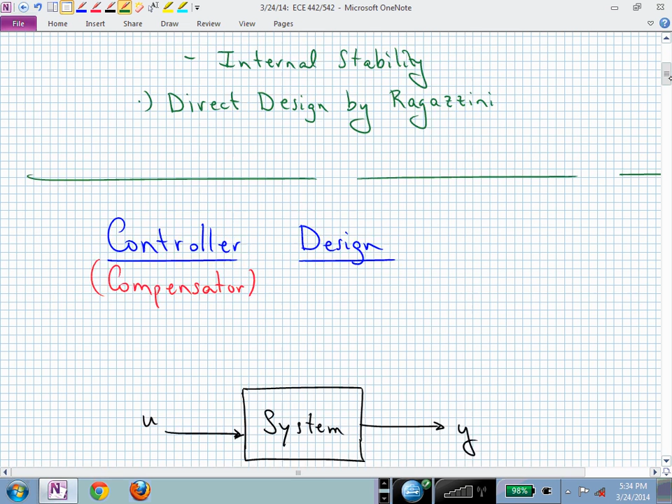Maybe this will provide you with insight into somebody going, oh, look at this, this is going to work. And you design a controller and then you start thinking, why is my system sort of not working the way I want it to? At least you'll know maybe why it's not working the way you were hoping it would work. That's the idea. Let's begin our scrolling.

We have a system, and that system, I haven't provided arguments for the input U and the output Y. I've just left those blank. That could be T, it could be Z, it could be N, it could be in the frequency domain or time domain is what I'm meaning. If it's in the time domain, it might be U of T or U of N. If it's in the frequency domain, it might be U of S or U of Z. But you now know how to interpret all of those different forms of this input-output relationship, and now you have a system.

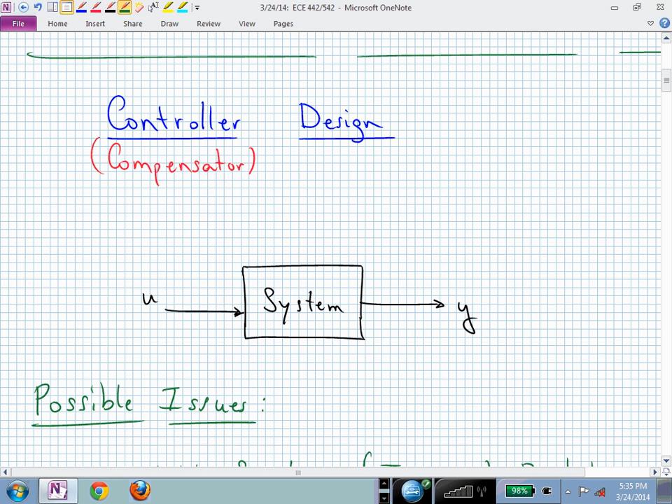That system might be in the form of a transfer function, state space representation in both discrete time or continuous time. But we know that that doesn't always come in the right package or with the right characteristics. For example, maybe it's unstable, and one academic problem that's typically used frequently for an unstable system is an inverted pendulum.

So can you stabilize a ruler or a yardstick on your hand? And if you can do that, then you're a good controller, right? How many have ridden a Segway?

Just the former president—President Bush, I think, was riding Segways. And they give campus tours on the Segway, so whenever you see that, you might think, oh, that's an inverted pendulum. I know how to control that, or I can control that.

You've probably ridden a bicycle. If you just tried to balance, in a sense, that's an inverted pendulum. A rocket is an inverted pendulum, and we try to control that rocket to go from point A to point B and hopefully stay within that particular trajectory from A to B. Those are control problems of unstable systems.

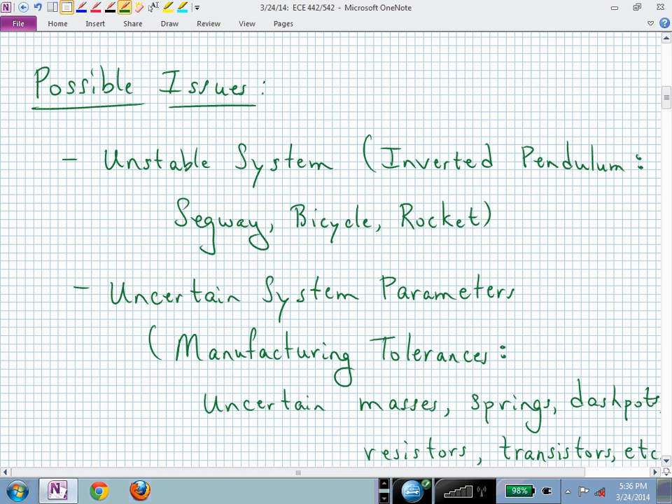Your system might have uncertain parameters. Maybe you're just given a bunch of springs, 1,000 springs, and they're not all going to be manufactured exactly the same. Or you might actually be expending fuel in your rocket, and now your mass is changing as your rocket's flying. How do we deal with that?

So your system might have adjustable, uncertain, or unknown values associated with it. And we want to be able to connect a controller to that system so that the closed loop behaves consistently, even though the original system may not be very consistent.

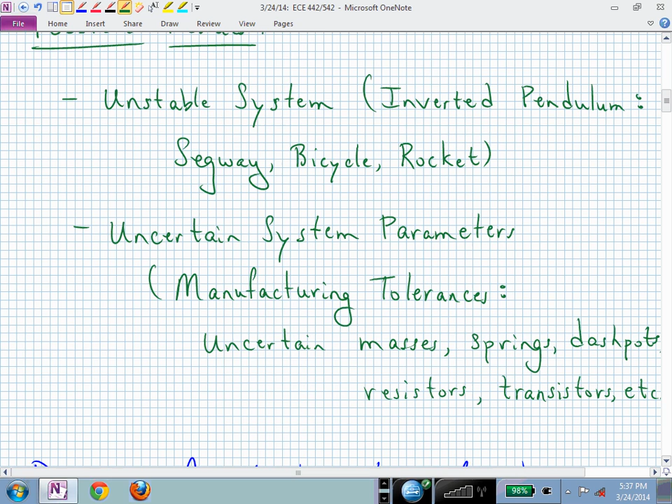And you've seen that maybe in an earlier class with transistors, where maybe you use the feedback concept because the gain of that device may be all over the place. But if you connect it up properly, then it will start to give you a more predictable or effective or consistent input-output behavior characteristic. And that's what we're wanting to do with our controllers.

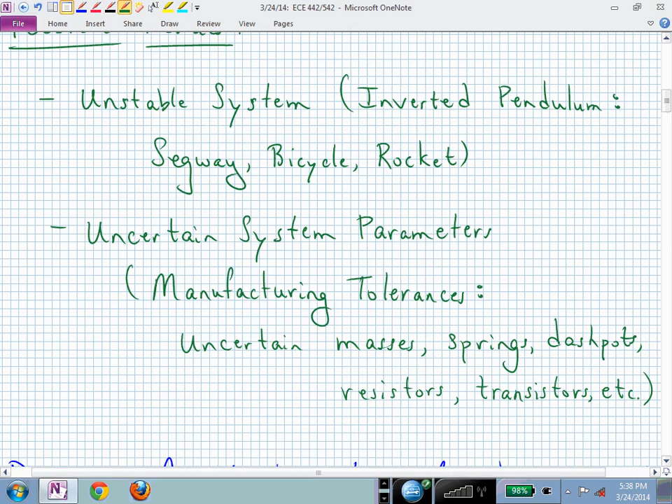We have these possibly unstable systems, but probably, definitely, a system whose parameters might not be very predictable. Maybe they are in a range, but you want to hit that target every time. You want to make sure that even though your system might vary in the open loop by 100%, maybe you want to maintain this input-output behavior relationship to an accuracy of less than 1% between your input, reference input, and your output. And that's what I'm saying here.

Your desire is to maybe correct that open loop system into a new desired system, make that desired system—this is now T sub C. I'm afraid I have a lot of T's floating around: T we use for the sample period, T sub S we might use for the settling time, and now I'm using T for a transfer function.

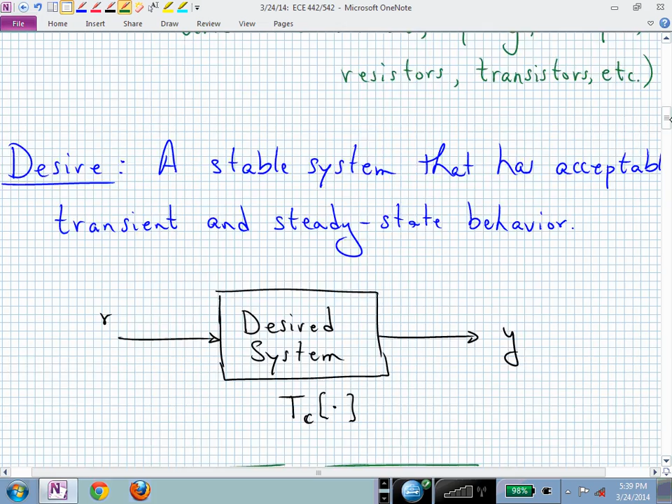But I'm hoping that you see by context that this has some brackets associated with it, and it's a transfer function. This is, let's say, T controlled, because this might be T sub C of S, it might be T sub C of Z. I haven't yet said, but you should be able to work with both of those kinds of scenarios.

We're just going to focus on two types of control structure today and most of the semester, if not the rest of the semester: open loop and closed loop.

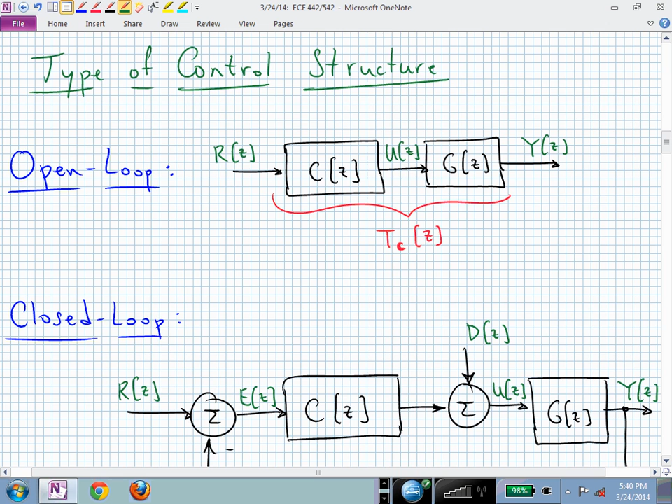If you simply want a T sub C of Z, a desired transfer function, and somebody gives you a plant, can you design a compensator, a controller, that maybe just inverts that plant and plugs in what you want it to be? That might be a design, but we'll see that maybe that's not going to work all the time.

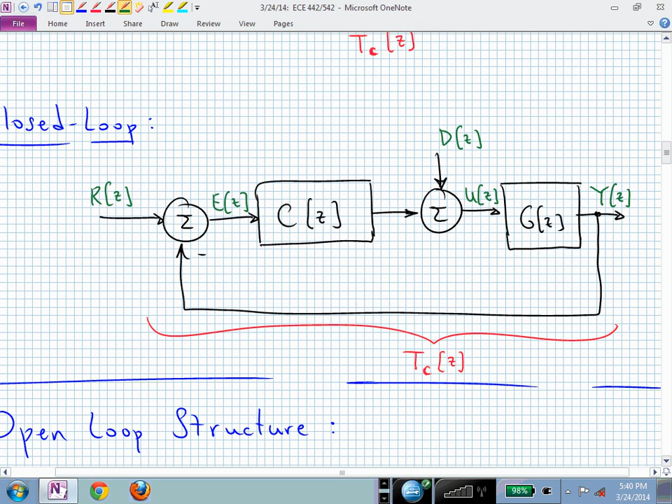Or we might have a closed loop design structure, and this should be comfortable to you, or you should be familiar with this diagram. And now I'm referring to this transfer function T sub C of Z between the reference input R and the output Y. And you have to find the transfer function that T sub C of Z corresponds to or is equal to.

Let's look at some of these situations that I hinted at before. For example, in the open loop structure, we want this combination of the plant G and the controller C to be like a transfer function that we want it to be.

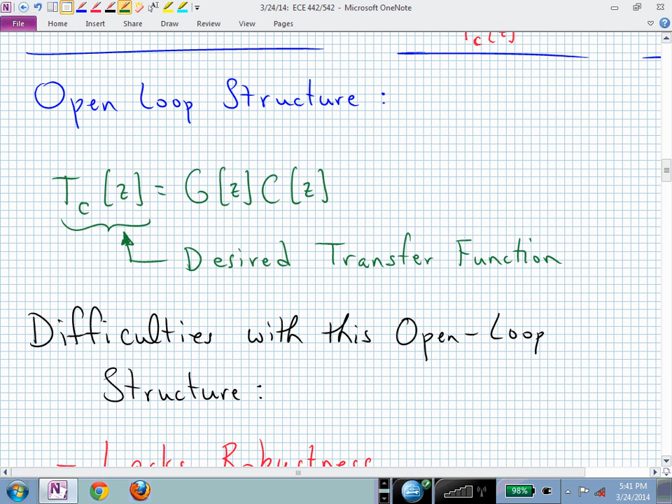What are some difficulties that might arise with that? And I don't know if you've heard this word much at all, but in a controls class, in a controls setting, in a controls environment, people are going to be talking about robustness. Is your controller robust? That means, does it work consistently when your plant might vary all over the place in terms of its parameters?

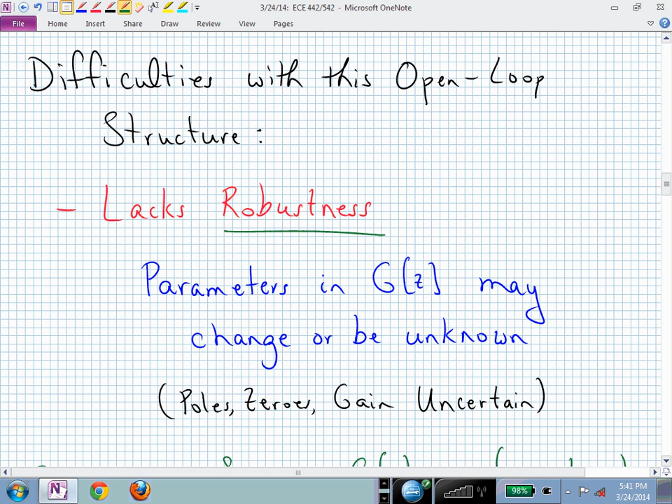Is your system robust? For an open loop system, it's probably not a very robust design, because the parameters in G of Z may, like we said, be unknown, or they might change. And if your parameters vary, then your poles or your zeros or your gain—or all three—might be unknown or moving around or unpredictable.

Now how do you control it? Let's look at a very simple case. Here's an example.

Suppose this plant is just a constant, and we'll call it little g. Then our desired transfer function between the input and the output is the product—this is open loop again—of our system G, which is just a gain, and our controller C of Z.

Now, if we want good tracking, what does that mean? It means we want the output Y to look like the input R. If I have a telescope and dial it to a certain angle to point at a star, I hope it finds that angle—if I turn it 10 degrees, it shouldn't go to 50 degrees; if I turn it to 50, it should go to 50. In terms of driving, you want to tell your car, I want to go 30 miles an hour, now 50 miles an hour. It's tracking your input. That's what I mean by a system tracking the reference input.

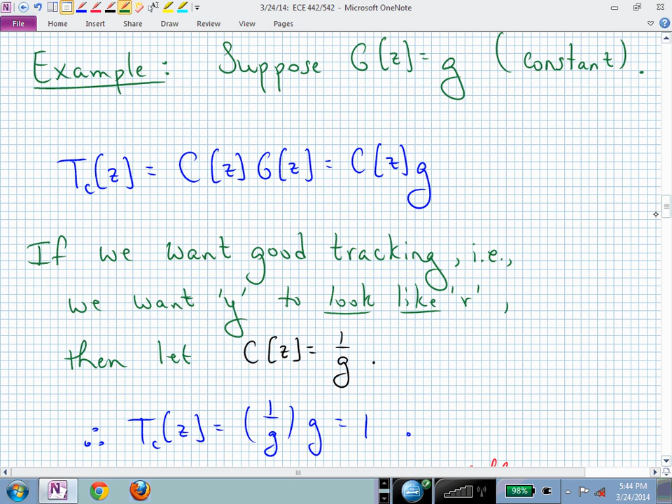There's always a 'but.' But what if the plant wasn't what you thought it was, or it's changing, or it's now a different constant? Maybe this plant is some device you're having to control, coming off the assembly line. Now you get a G, you get a G1, a G10, a G30, a G1000. They're not all going to look the same. And you've now designed for one G. Uh-oh.

Now that T sub C, let's call it sub 1, is what we thought we were supposed to get: 1 over G, we'll control it with 1 over G, but now it came out as G1. So we're not looking at 1, but at this new ratio, G1 over G. In terms of response, if this is where we wanted to be—say 10 degrees—because G and G1 are not the same, maybe we get to 7.5 degrees.

And for that reason, Y does not look like R. There's an error—the difference between where we wanted to be, our reference R, and where we actually ended up, Y.

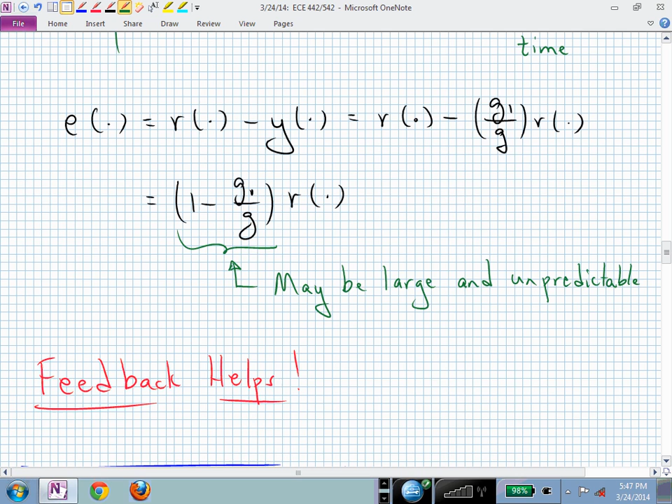That was open loop. Now, maybe that's not what we want. Let's look at the other scenario, the closed loop case, or when we have feedback. So now when I say feedback, we have that closed loop configuration we introduced earlier, and this is the structure we're dealing with. Does this help us out a little bit? I've already hinted that yes, it's going to be better than open loop, but let's see what else happens.

So here is our system, and if we simply want to focus on the reference input to the output Y, then what do we do with our D, which is a disturbance?

We can just zero that out. This is a linear system. If we're interested in what's happening to our error due to a disturbance, or what's happening to our output due to a disturbance, we could look at that transfer function and let R equal 0. The external transfer function between R and Y is the one we usually concentrate on, but we have to make sure our system remains internally stable. No matter what happens to D and R, E better be well behaved, and Y better be well behaved for a disturbance D. If I give you a bounded disturbance, you better get a bounded output.

There's our closed loop transfer function: GC over 1 plus GC. That should now be emblazoned in your head, in your brain, until at least after the final. And if you're interviewing and somebody asks if you've had a control class, and they give you this block diagram, or maybe you draw that block diagram for them and say, oh, we were dealing with this kind of control scenario, you can say the transfer function is GC over 1 plus GC.

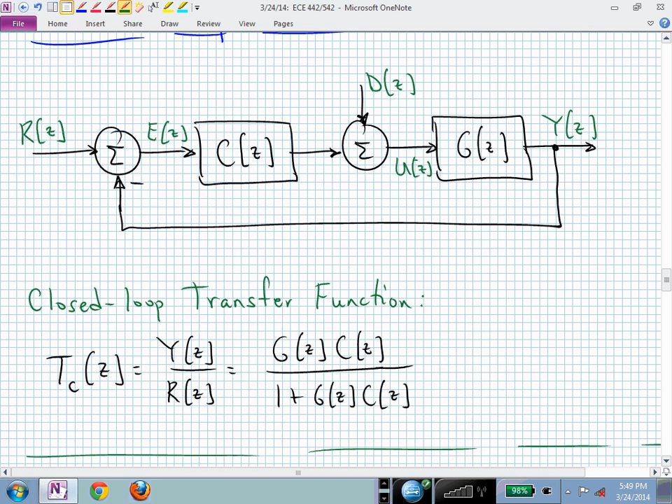And if you've forgotten, you can just rederive that with some block diagram algebra. Y is just GC times E. The error signal is the reference minus the output. Make that substitution, and now you have Y is equal to GC times the error, which is R minus Y. Do some algebra, pull the Y terms to the left, divide by that expression scaling the output Y, and now we have our controlled transfer function T sub C of Z: GC over 1 plus GC.

It's the forward branch if we have unity output feedback. Unity, there's nothing but a wire between the output and the summing junction, so it's unity, and it's negative output feedback. With unity negative output feedback, we have this plus sign, and in the denominator we have 1 plus GC. Upstairs we have the forward path, which is GC.

What does feedback buy us? Here's an example with feedback. Again, we have a plant that's a constant, G. Suppose now somebody says, let's just have a controller that's a constant also, K. Well, we just derived the transfer function between the reference input R and the output Y. That was GC over 1 plus GC. Capital G is just lowercase g, a constant. The controller is a constant, capital K.

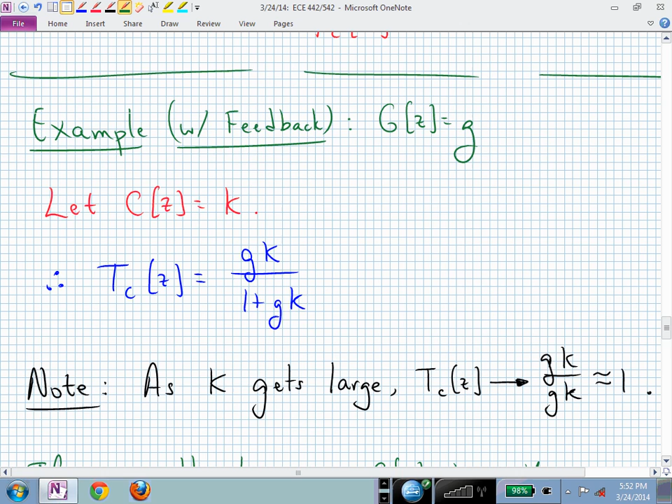And now if you let K get big, GK dominates 1. The denominator starts looking like GK. GK looks like the numerator. And that, now you have a ratio GK over GK, and it doesn't depend on G. Now G could be G1, it could be G30, it's still going to be G30K over G30K. And if K is big, we get what we wanted, 1, for this transfer function between the reference input and the output Y. So our output tracks our input for large values of gain K. That's what we want.

Anybody reading along?

If we could cure everything with a big gain, you wouldn't even need to be here for this class. This class would be unnecessary. But then you couldn't command the big bucks when you graduate and say you've had a controls class. So there has to be more to it than just cranking up the gain K and celebrating.

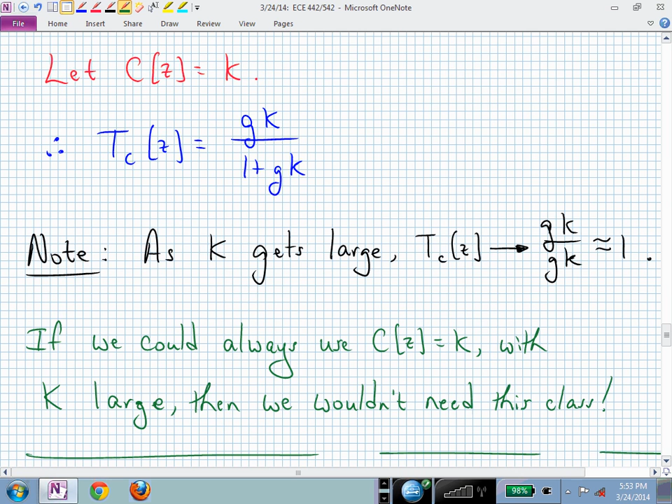Sometimes you need just a little bit more than that. Sometimes that's all you need is a large gain, and that corrects things, as we just saw in the last example. Here's another case. Let's look at a system that's a little more interesting, with some dynamic behavior versus just a gain.

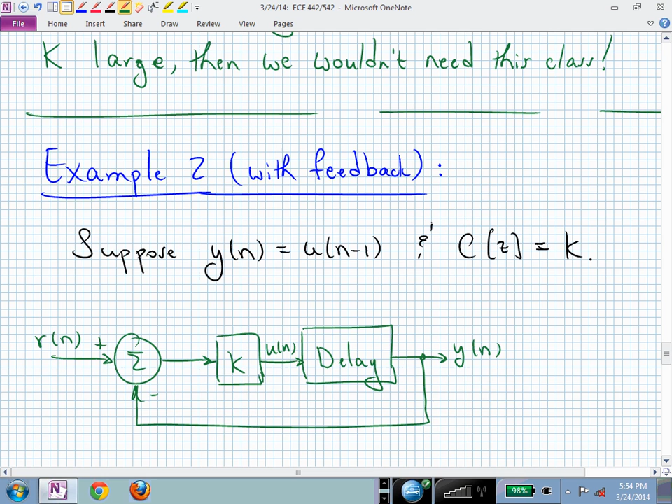Suppose our system now is just a pure delay. Suppose Y, the output, is just the previous input. You put in an input, it's just going to sit there in a memory location or a holding pattern, and the next time step, that becomes your output. Let's connect that in this classical feedback configuration and see what happens. Again, let's just keep our controller as a constant K. But this system now has some dynamics. It's a memory, just a one sample period delay. And what happens?

Suppose we want Y, our output, to track a constant, a step. Let's let the reference input be 1, a unit step, and we'll say here is our time t equals 0. We can draw that on paper, paint it on the floor, or put it in the sand. We can figure out where time t equals 0 is. From that point on, what's going to happen?

We know how the output y is related to the input. It's just the input one time step before. Meaning y at time 0 is u at time n equal minus 1. And we're assuming everything was non-energized for this example.

U of minus 1 is k times... u is just k times this signal, which is the error signal. And if you're listening at home, you don't know what signal I'm referring to, do you? There, it's highlighted now. But that's the error signal, k times that error, and the error is just r minus y.

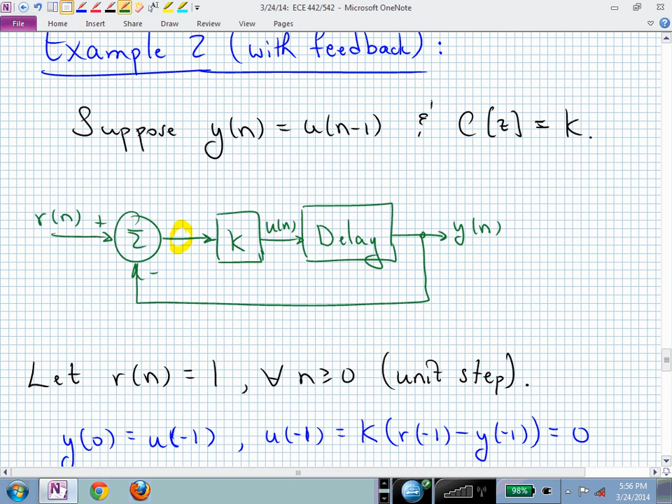That's okay, haven't done anything. Now let's turn on the input, or the reference signal. U at time 0 is k, r of 0 minus y of 0. Well, we just computed what y of 0 was. That was 0. R was the unit step.

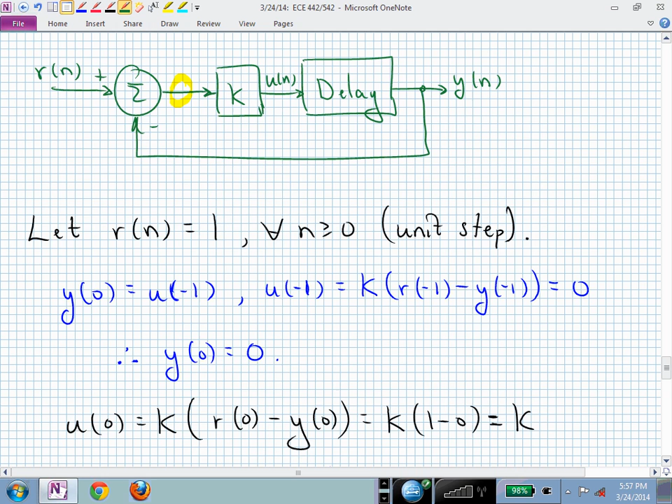That's just going to be 1 from now on. So the u of 0 is k. And that tells us now what y is at the next time step, y1. y1 is just u of 0, which is k. We're at 0, then we're at k.

Now we know how to find u of 1: k times the error, and the error is just r at the time that we're interested in, which is 1, minus y of 1. So we have k times the reference input 1 minus k. Now u of 1 is k minus k squared.

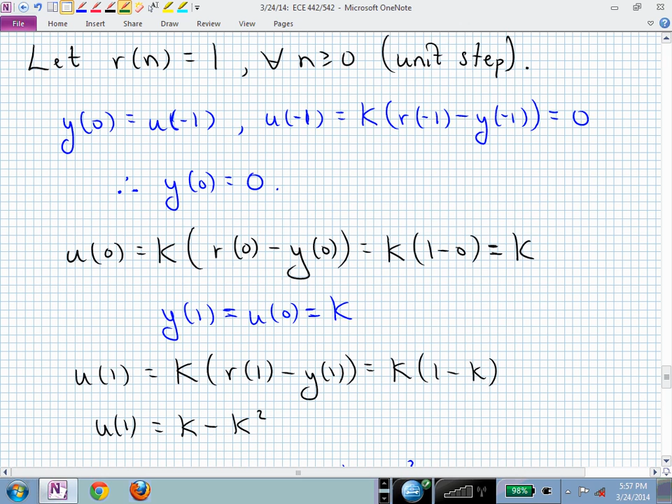And that's going to be what y at time 2 is. Y of 0 was 0. Y of 1 was k. Y of 2 is k minus k squared. Can you see a pattern?

Oh, let's find that pattern. U of 2 is k, r of 2 minus y of 2. But y of 2 we just found, that's k minus k squared, which we subtract, and we get minus k plus k squared. Scale that by k, and now u of 2 is k minus k squared plus k cubed. So now we're just alternating signs and raising k to higher and higher powers for each subsequent value of y.

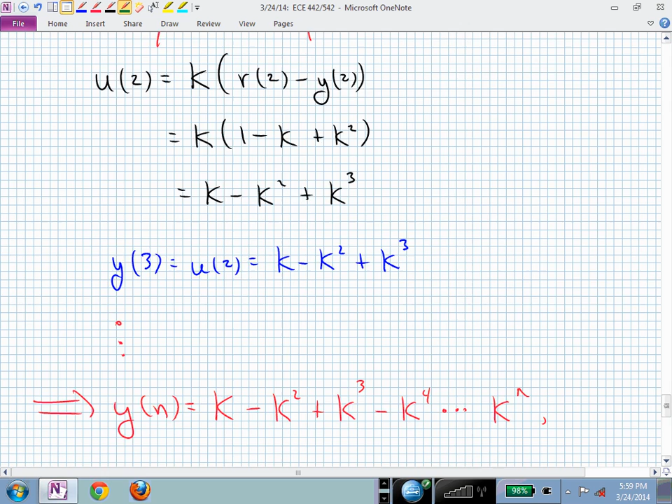So now if you were thinking we could cure everything with a big K, think again, right? Now we have dynamics in our system, just a delay. That's about as basic of a system as you can obtain. And now what do we have? As long as k is less than 1, we'll sort of be okay. It may not get us close to where we wanted to be. Maybe we say let's go to 1, and we end up at a third. But at least that error is not going unbounded.

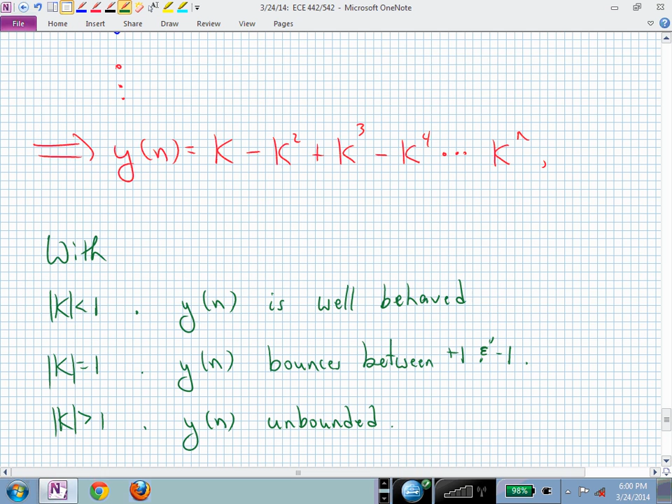If k has a magnitude of 1, then you're adding 1 each time: 1 minus 1, so it could be 1, 0, 1, 0, or it could be 0, minus 1, 0, minus 1. It's switching back and forth at each time step. And if k is bigger than 1, now you're just going to be violently banging back and forth between a big positive value and a big negative value. So we can't solve everything by cranking k up if we have some dynamics in our system.

There's our takeaway: we can't cure everything with a large gain, not all the time. And there's sort of an example. So if we were in a math class and somebody said, oh, you can cure everything with a big K, now there's your counterexample. So there's an economics example. Maybe that's your budget. Never mind.

All right, we'll slow down a little bit, but we've now figured out that maybe feedback is better than not. But can we figure out what we can do, or how to build up that controller based on this interaction of our system and potential structures of these controllers C of S or C of Z? We may not always want to just use a gain. We may have to put some poles and zeros in there. What are some benefits of feedback?

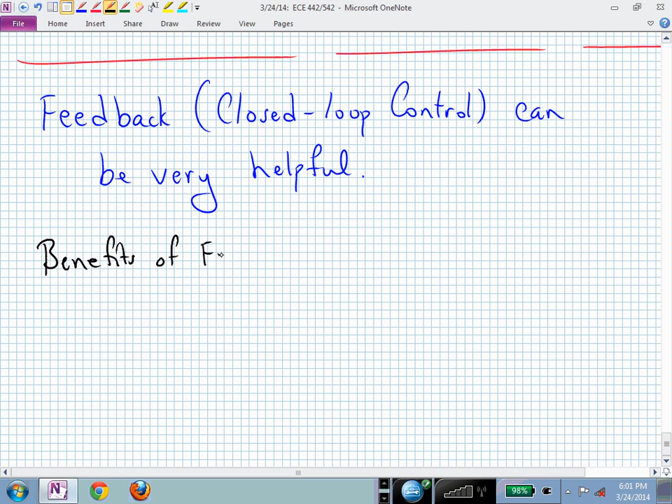Do you remember our Segway? Not the transition between topics, but this device that we might ride, or a bicycle. If you just had to try to stand on the bicycle and not move, it's not easy to keep it upright, is it? That system may be unstable. Maybe you have this inverted pendulum. Well, feedback's going to allow us to stabilize unstable systems.

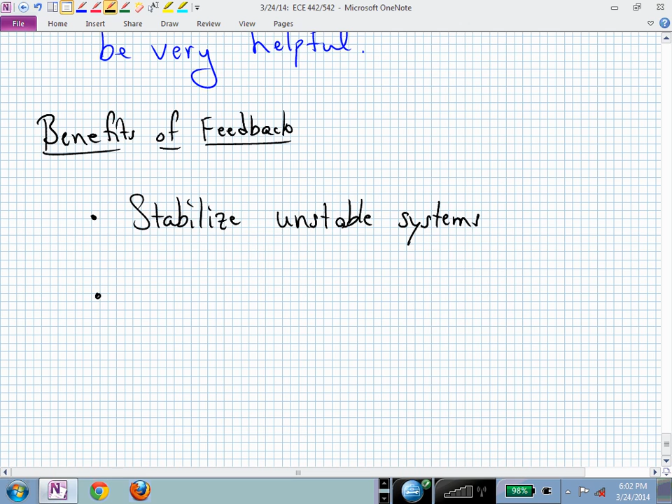But all systems aren't generically unstable. You might have a stable system, you just want it to behave better, more predictably. You may want to change the system behavior.

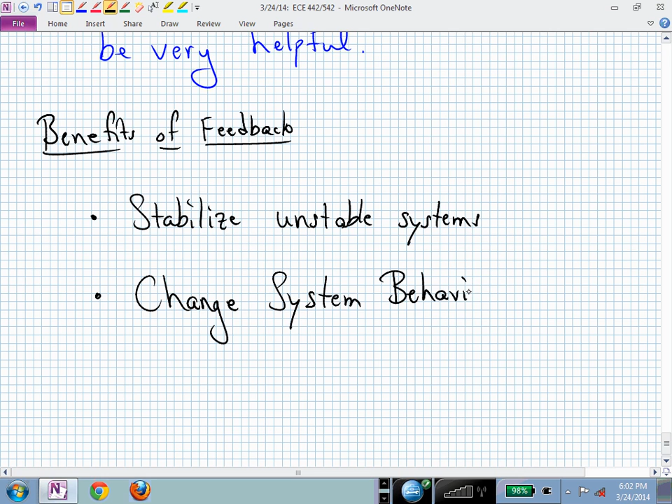And there we really have two main classes of behavior that I want to refer to. One behavior is to improve the transient characteristics or properties. So improve the transients.

And what have we used to measure those transients? How quick are we going to settle? What's our settling time? Maybe that's not quite fast enough. We want to enhance that, we want to shorten it. One transient we might be interested in is a settling time behavior or characteristic.

Now, is that motivating some other transient properties? What was our robot arm that was moving close to a confined space? Overshoot. We may not want too much overshoot. We may want to improve the percent overshoot behavior of a system. That's a transient behavior.

We may want to get quickly to our destination, or we might want to have a quick time to the first peak. We want to minimize our peak time. That's one class of behaviors that we might be interested in, which are transient behaviors: settling time, percent overshoot, peak time.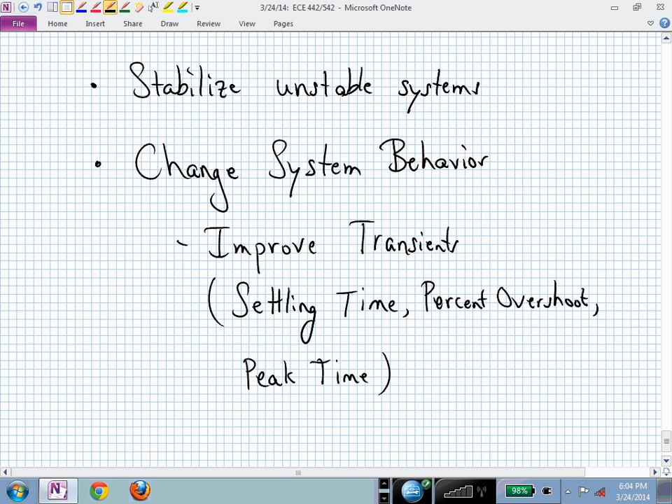Another category of system behaviors is how well does Y, the output, look like the input R. That's what I'll call a steady state behavior. Can we improve steady state accuracy?

And control, if somebody said describe control in one word, your discrete control class, one word, how would you describe it? Well, maybe it's a hyphenated word: trade-off. You have to figure out what you can trade off with steady state accuracy versus transient behavior. It's this balancing act, and that's what you get paid for. It's figuring out how to make that trade-off in the best way. You can't always get both necessarily, and you have to maybe sacrifice one for the other.

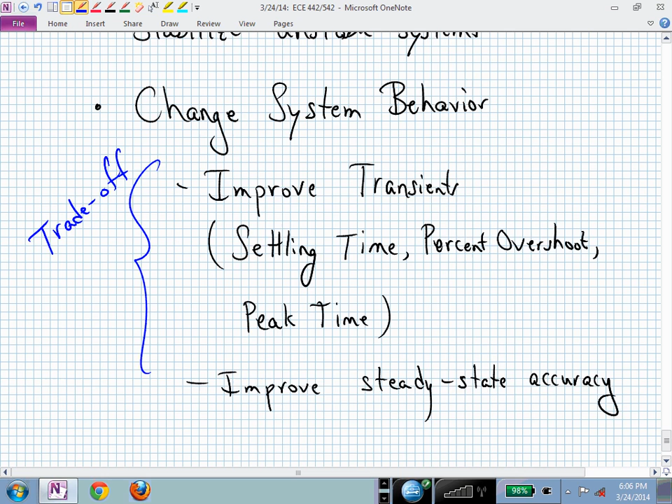Here's what we might have in terms of a picture. If you were looking at here's time, and maybe this is where we want to go. Let's say this is our desired response, or this is the reference input. Maybe this is R. And I'm not going to say whether it's continuous time or discrete time. It's just maybe a constant.

And now you look at what your system does, and maybe your system does something like that. When you say go to R, it starts oscillating, and it ends up not quite to where you wanted to go. So there's a fair amount of error between your desired response R and the steady state output. And maybe it's wiggling more, or maybe it got to that final destination in too long of a time interval. Maybe your settling time was too large. Meaning maybe what you want to do is do a better job of controlling that.

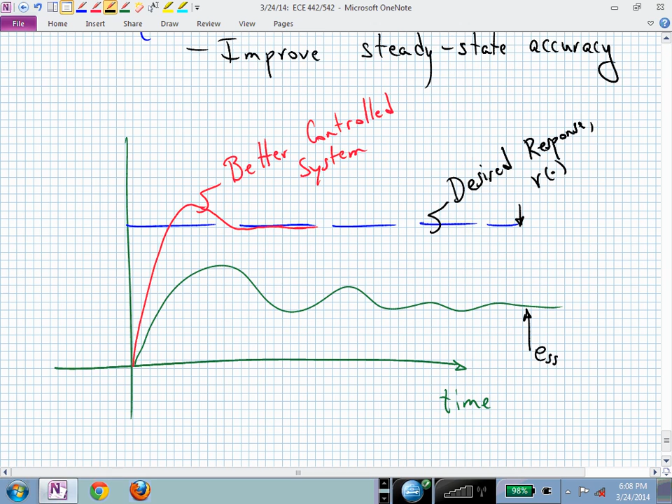And now maybe this red line is a better controlled system. It may actually have zero steady state error, where here is our steady state error. We may want to figure out how to transition from this green curve to a red curve. How do we build a controller to make that happen? And what we have to keep in mind is in the process of doing this, we can't just look at one transfer function. We need to make sure that our system is internally stable.

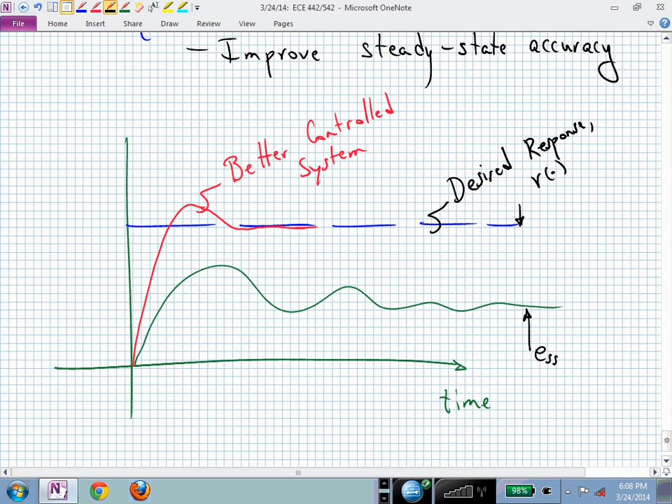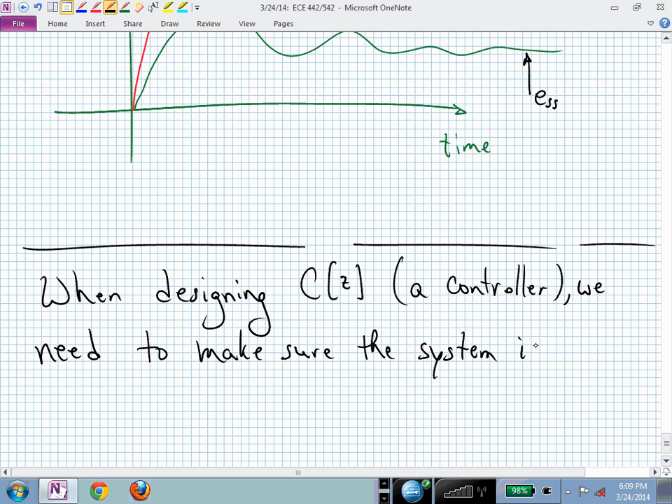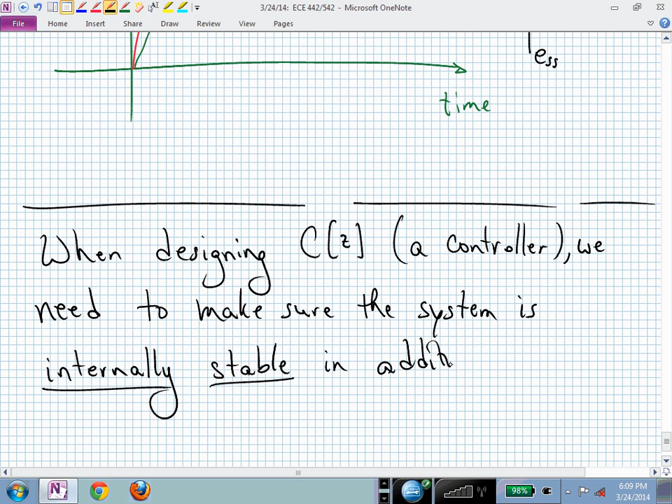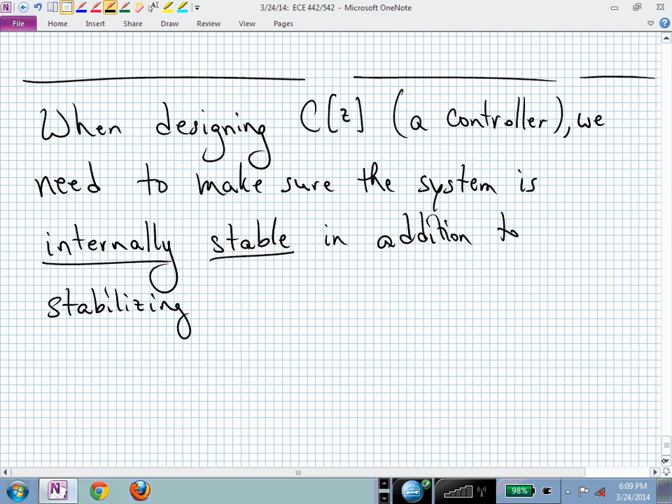When designing a C of Z, which could be this controller that we're interested in, we need to make sure the system is internally stable, in addition to, let's say, stabilizing this external transfer function, which we were calling T sub C of Z. And do you remember what the transfer function of that was? Between R and Y, which I said needed to be emblazoned in your noodle.

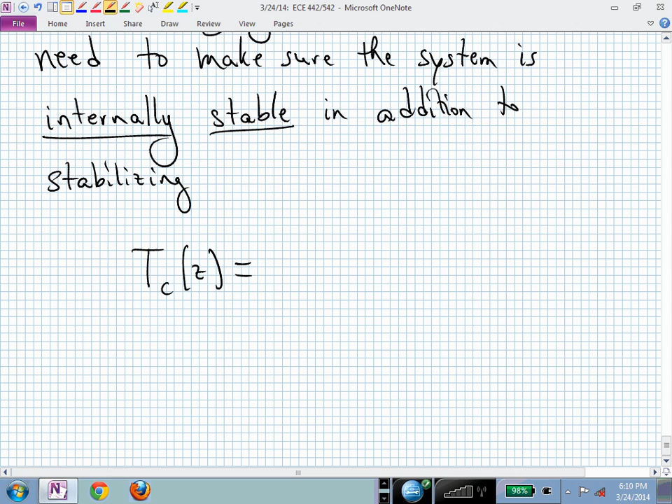Since these are scalar transfer functions, G and C commute. So you could say GC over 1 plus GC, or you could say CG over 1 plus CG. It's the same thing, since we're dealing with scalar transfer functions.

So let's say this is GC over 1 plus GC. We not only need that one to be stable, so we're now looking at the zeros of 1 plus G of Z, C of Z, but we also need to ensure that we have 3 more transfer functions that are stable, or bounded input, bounded output stable. For internal stability,

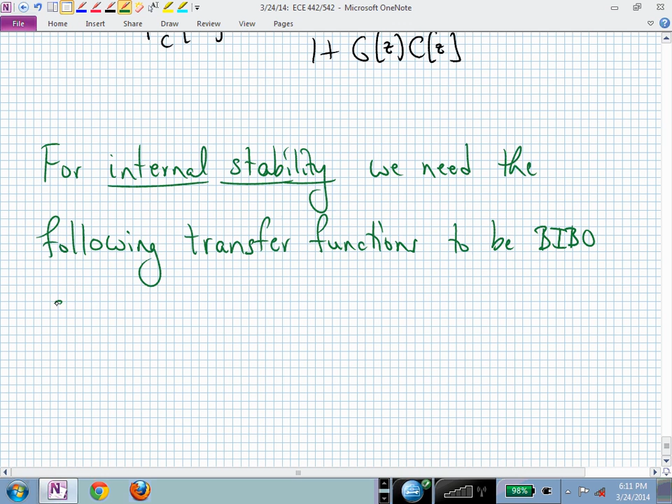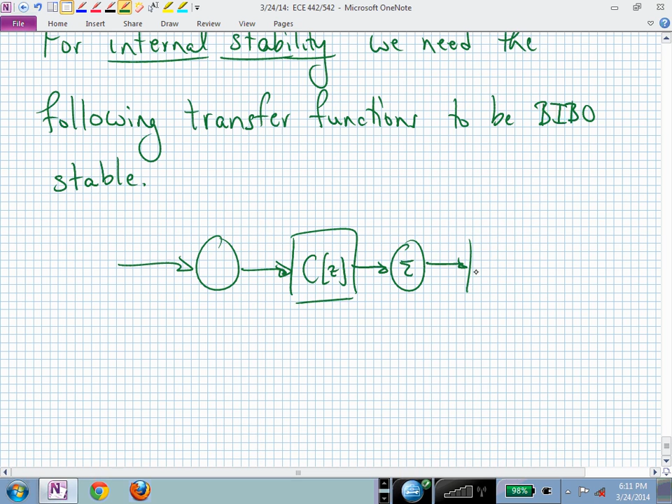We need the following transfer functions to be bounded input, bounded output stable. And maybe I should put the diagram in front of us so we can keep track of what we're dealing with.

We might be interested in the transfer function between the reference input signal and E. Meaning if I inject a bounded reference input signal R, I better get a bounded output at the error. That's one of the transfer functions that we're interested in.

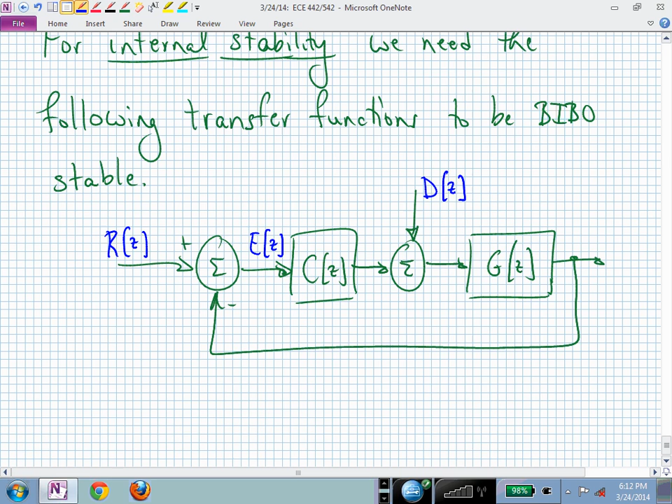We also want to ensure that if a disturbance occurs—maybe we're designing a cruise control and now the car goes up an incline, that's like a disturbance. That incline now is a disturbance input because it's different from what we're controlling with our own pedal. We want to make sure that the transfer function between D and Y is stable.

And we also want to have our input signal well behaved when we inject a bounded input at the reference. So our reference input better produce a bounded input to our system in order to be internally stable.

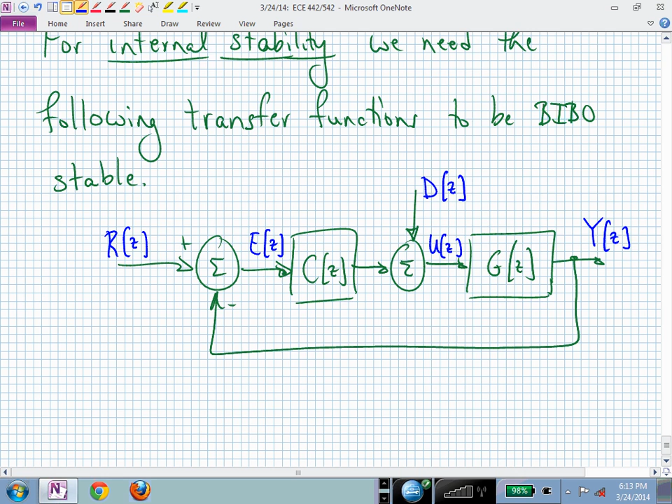If you look at and do the block diagram algebra, the transfer function between the reference input R and the error signal E is 1 over 1 plus CG. We need that one to be stable.

We need the transfer function between the disturbance and the output Y to be stable, and you can rederive these on your own tonight. G over 1 plus GC—that's not the same as GC over 1 plus GC. And this one between R and E is not GC over 1 plus GC, is it?

And the other one that we said we wanted to have stable was this transfer function between the reference input and the input U to our plant. U over R is now C over 1 plus CG.

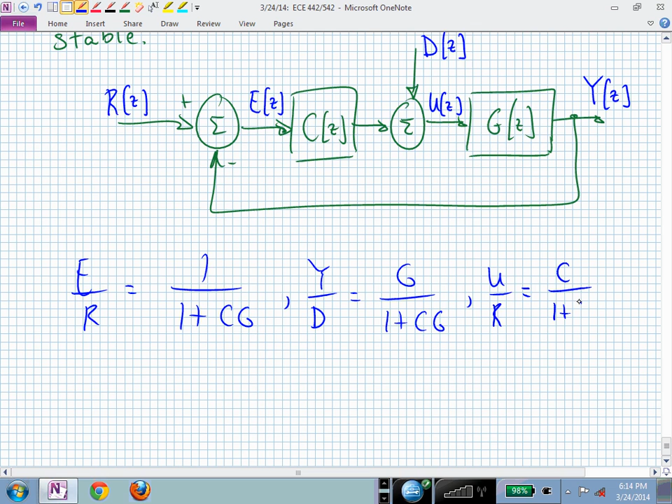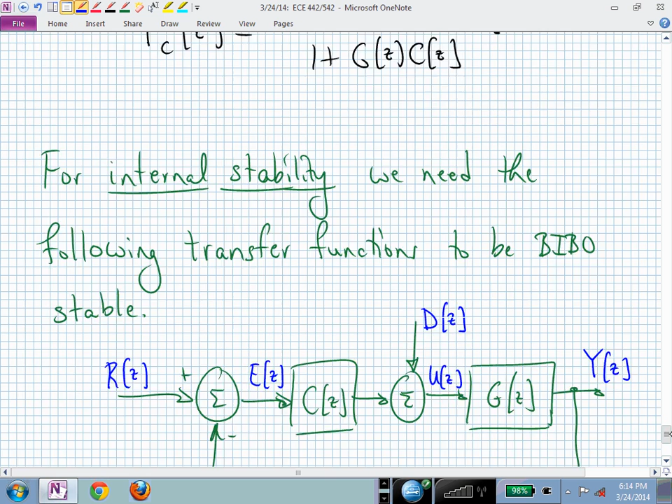Now if you look and compare that with our external transfer function—this was the transfer function between what? What was the input? The reference. And what was the output for that transfer function? The output, Y.

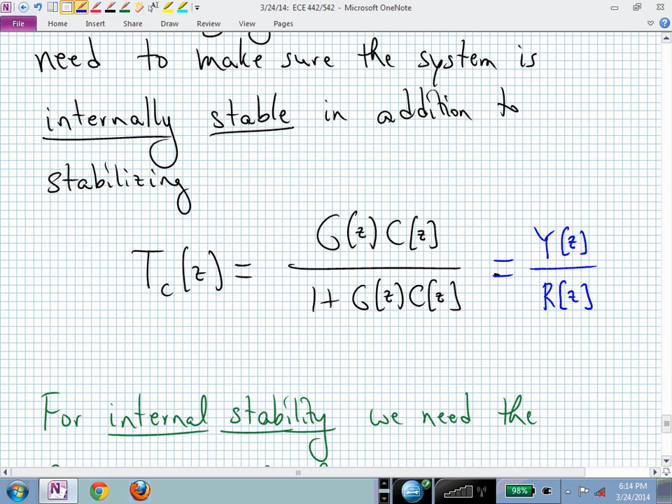That has the same denominator, doesn't it, as all of these, 1 plus CG. But they don't all have the same numerator, and so we might have cancellation issues between one and the other. Meaning if we try to make 1 plus GC nice, that may be well and good for our external transfer function, but we may have issues when we look at the cancellations we might try to create when we're designing a controller C of Z just from the external transfer function T.

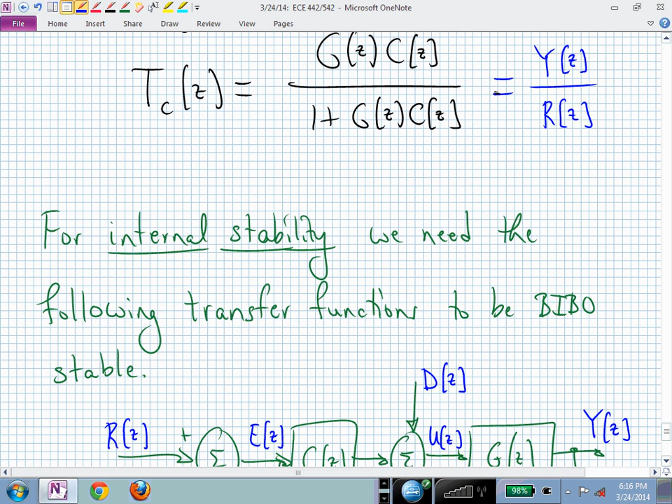If these three are bounded input, bounded output stable, then our system, we will say, is internally stable. Because of the difference between this numerator and these numerators, we're going to have some differences in poles and zeros in these transfer functions. And we want all of those transfer functions to have their eventual denominator with poles where? In this class, inside the unit circle. That will give us a bounded input, bounded output stable response.

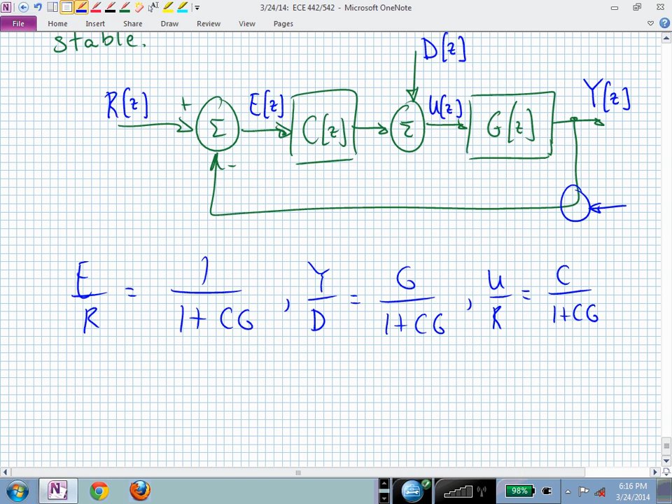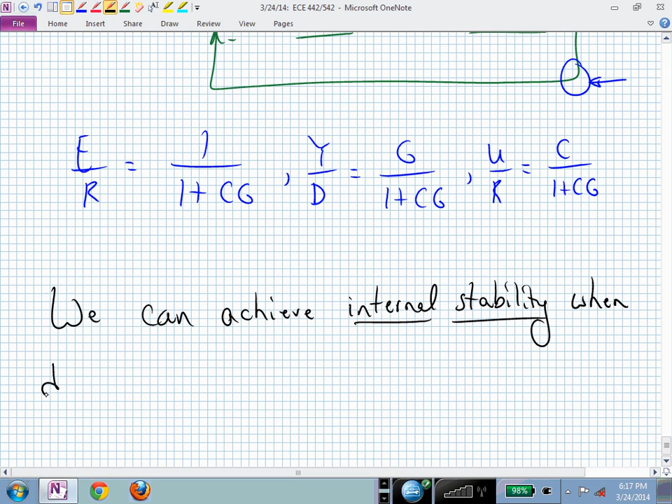Now, instead of having to check all of these every time you design a controller, we can sort of get away with achieving internal stability under this condition. We can achieve internal stability when we're designing this controller C of Z if we keep that controller C of Z

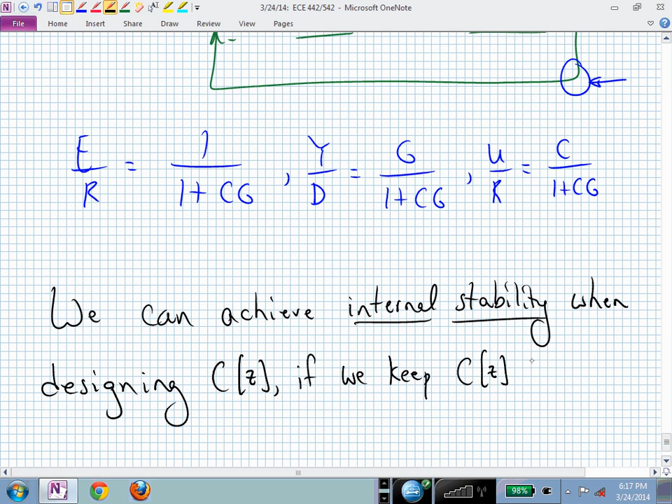from canceling unstable pole and zero factors in G of Z. Meaning if you had an unstable system, you can't build a controller C of Z and maintain internal stability if that C of Z actually tries to cancel that unstable pole in your original system G of Z. Or if you have a zero in G of Z that's living outside the unit circle, and for whatever reason you say, oh, I'm going to cancel that with a pole in my controller.

No, no, no. That cost you 50 points out of 10 on the exam.

So this is what you need to focus on. If you think, well, I don't know how to stabilize my system unless I cancel something outside the unit circle, say no, no, no, I can't do that, so I have to figure out what's going on. So we'll figure out ways to maybe give us some insight by doing state space designs. Maybe you look at this and you go, I have no idea how I'm going to control this system. Well, we'll go into a different domain and try to build a compensator using different techniques. And then we'll go, oh, why didn't I think of that? And that will then guide you in how to maybe design transfer function-based controllers, that maybe that's how you originally started trying to build a controller.

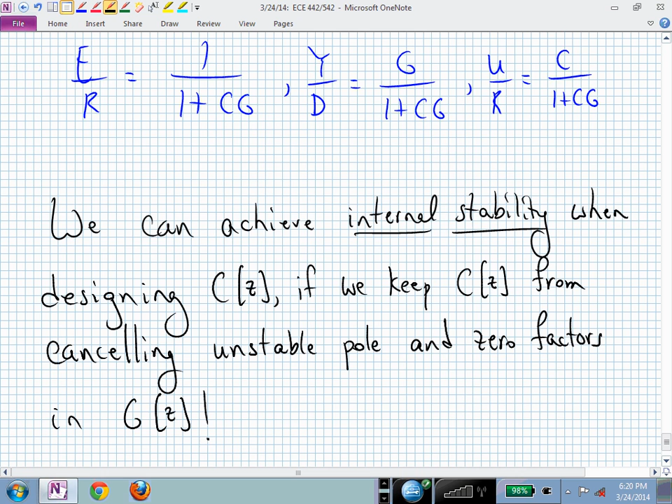Now that we have an idea that we want to make the output Y look like the input R, we want to stabilize our system, and we want to do it in a timely fashion with maybe a short settling time, a nice overshoot behavior. What we want, and we want to do it knowing we can't cancel things outside the unit circle with our controller. Let's look at some ways that we might do that.

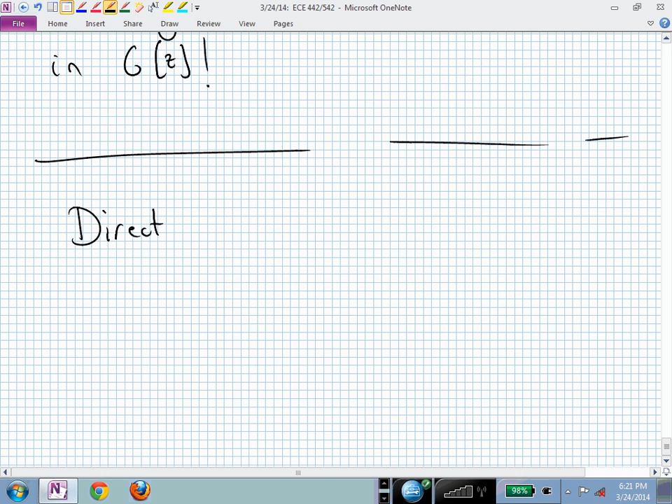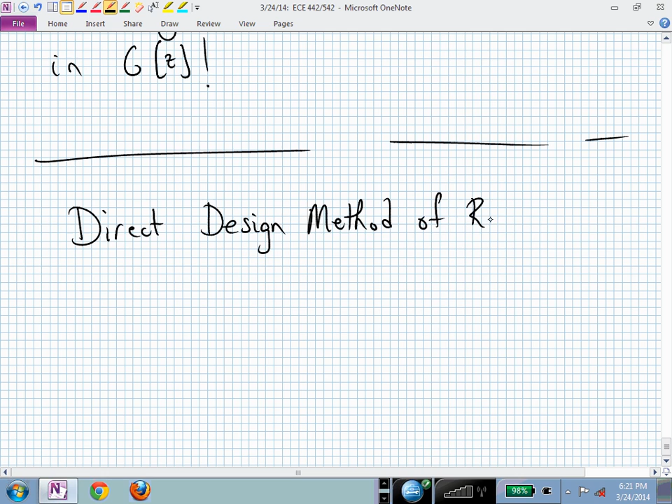And here's our first strategy. It's the direct design by Ragazzini. I just wanted to do that because of the name, right? But this is an individual that had a textbook. I think you guys were probably around 1958. Oh, maybe not. A few years ago. But he came up with this strategy. So it's the direct design method of Ragazzini.

And the reason I like to start with this is there's several reasons, but one is hopefully now you know how to build, or you now know how to specify. If somebody gave you the choice and said, give me 2 poles in the Z-plane that you want your system to possess, you now know how to find those poles based on different conditions, right? We have our Cupid spec. Bullseye and a heart, right?

So the bullseye is settling time, and the heart is percent overshoot. So if somebody gave you a percent overshoot spec and a settling time spec, those are the Cupid specs, and you now know how to make those happen with 2 dominant poles inside your unit circle, right? You know how to find an R, and you know how to find the zeta.

The zeta would then be translated into a theta sub D. Now you have your Z sub D, your desired poles, in terms of an R, a polar form, radius, and angle. And that would be your denominator of your T sub C of Z, your dominant dynamics.

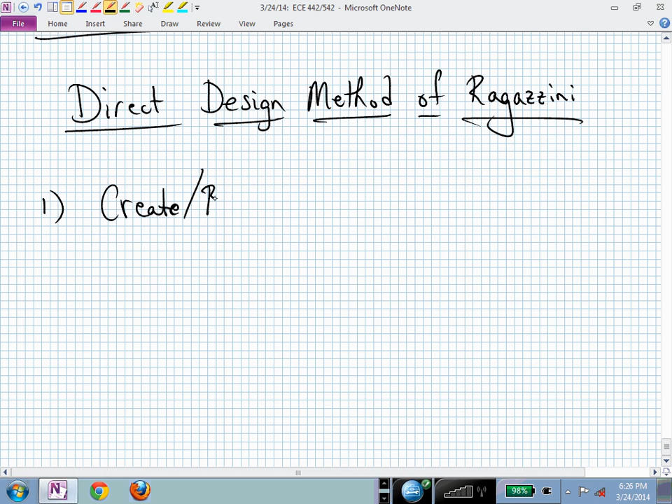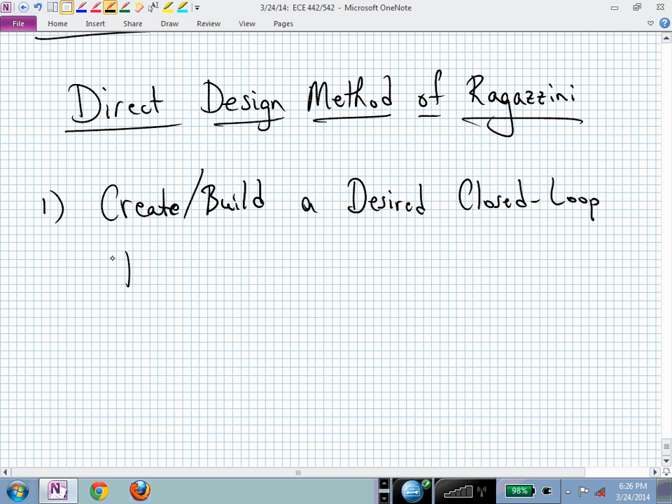Where was I? Oh. First thing we need to do is find a desired transfer function. That's the first step in the direct design by Ragazzini. So I will say, let's create, or design, since that's kind of in vogue. We want to design. So now you can get out your crayons and start designing your T, your capital T sub C of Z. So we're going to design, we're going to create or build a desired closed loop transfer function.

And now at least you know how to think about the denominator of that beast. Dominant poles might be specified by R, theta sub D, zeta, settling time, percent overshoot, peak time. Peak time gives you what? An angle in the z-plane that you might need to be beyond if you want a quick response.

Well, that seems pretty easy, but here's a big caveat. We can't just arbitrarily pick a T sub C, T sub C of Z. That's why, again, you're taking this class. You need to figure out how to build it. So certain restrictions, and I'm not going to go into those just yet, because I want to make this a two-step process. So certain restrictions will be placed on T sub C of Z. So don't forget that.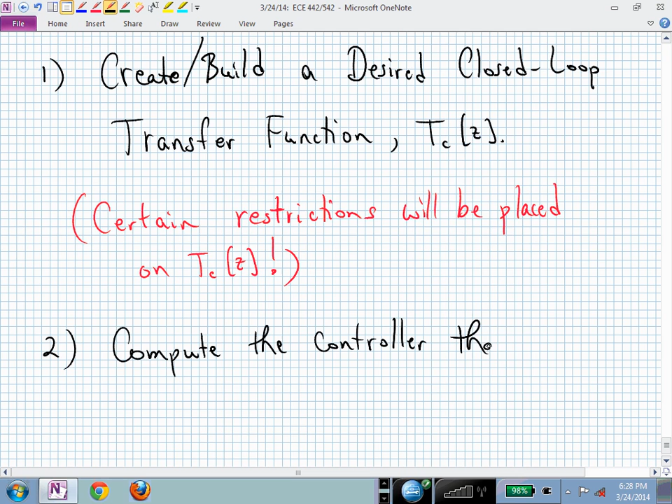But once you have T sub C of Z built properly with the appropriate restrictions, then it's just turning the crank to find your controller. Then we can simply compute the controller that makes T sub C of Z happen. And I shorten that to just say realizes. Compute the controller that realizes T sub C of Z.

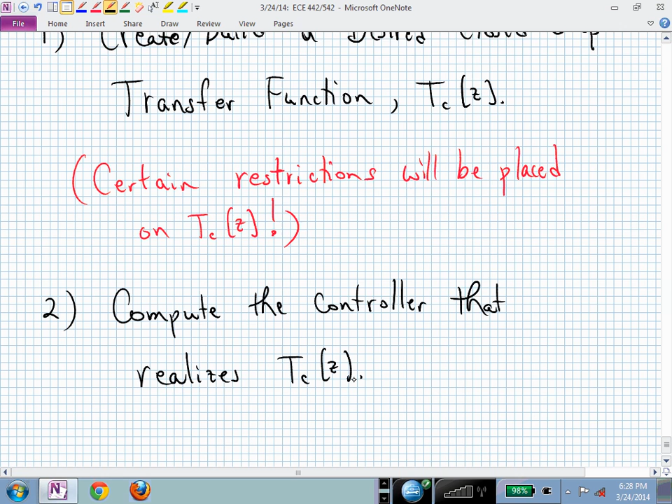Where T sub C of Z, remember, we know what that looks like because it's emblazoned in your noodle, right? That's just this G of Z, C of Z over 1 plus G of Z, C of Z. So if you wake up in the middle of the night and you scream out GC over 1 plus GC, you can just go back to bed and dream some more, okay? Because you're in the right place. GC over 1 plus GC.

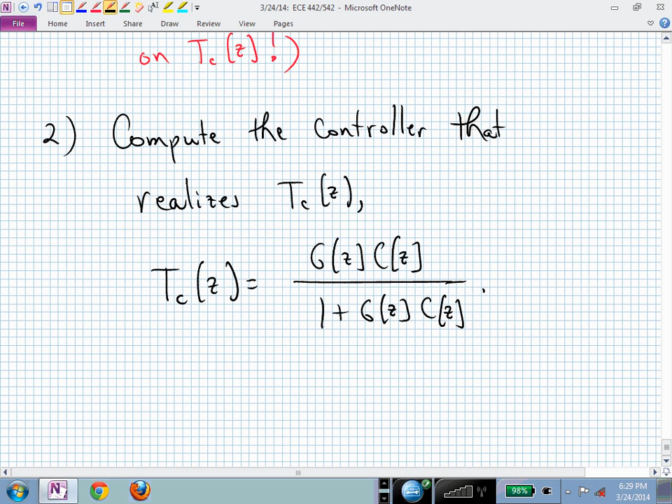Now, what does C look like if it makes T sub C happen? Well, we can just do the algebra. So now let's now solve for C from this relationship. T sub C, we're going to build. We're going to design that based on the design specs and certain restrictions. So we're going to have that in our hand or on our paper. We're going to have possession of T sub C of Z. We have our plant, G. We're now trying to find what is C. So let's just solve this for C.

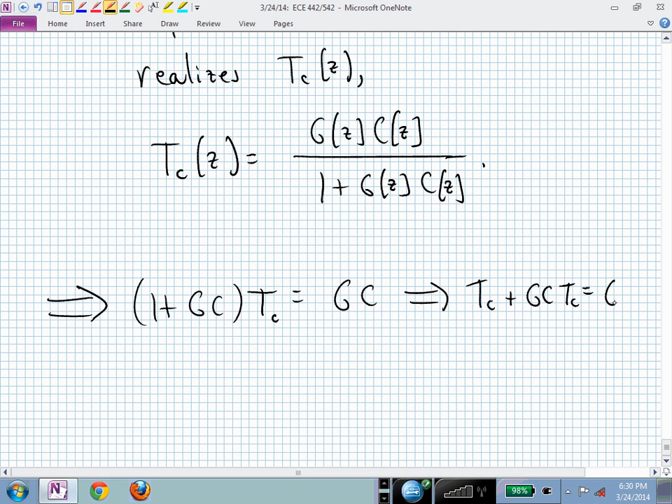That's all we're doing, and that will be our design equation. Meaning, let's just cross multiply. And I'm going to get quick and not include the arguments. So that T better be T sub C, it's not the sample period. So by context, you know what T is. And this is now equal to GC. But that's now just T sub C plus GC T sub C equal GC. And aren't you glad you learned algebra? But these G's and C's are rational transfer functions, aren't they? They're more than just variables, but that's okay.

Now we can, let's put all of our terms that involve C. We're trying to solve for C on one side. So T sub C can stay on the left, but let's pull that GC T sub C to the right. And we now have GC minus GC T sub C.

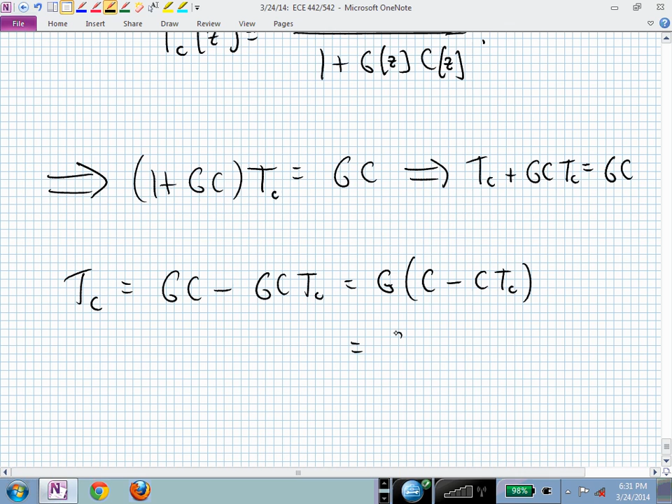Well, there's a common plant in those, so I have a G, and this is now C minus C times T sub C. Oh good, there's a common C. So this is now G times 1 minus T sub C, C. A lot of C's and G's and T's.

I better enunciate better, huh? Especially if you're at home, you don't get to see, well, you can see the board, most of it.

Now we just have to solve for C. And these are all rational transfer functions. They're scalar, so we can just solve for C.

C of Z, now I'll put it back in, is, let's just divide by G by itself. And G, remember, is our plant. So we now have 1 over G of Z. And we also have T sub C of Z, that we have on our paper, over 1 minus T sub C of Z.

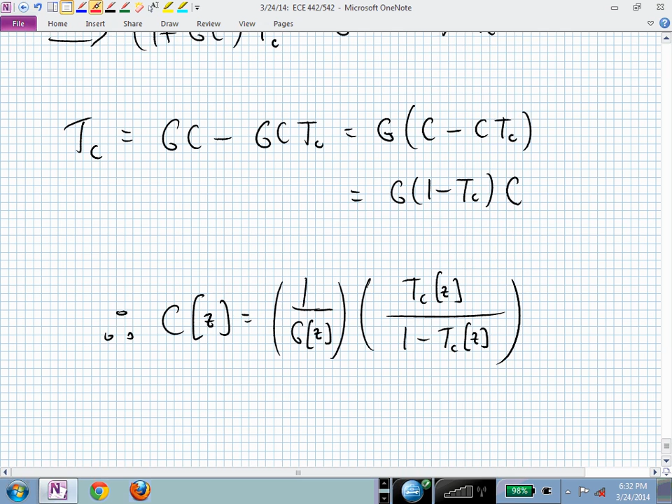This is our direct design formula, which, if you have your T sub C created or built, and you have your plant G, you can just turn the crank. I mean, it's going to be some algebra, but you can solve for this transfer function C of Z, which is your controller.

And what are you doing? Well, one of the things that you're kind of wanting to do is indicated right there. What did we say we like to do even in an open loop setting? It'd be nice to invert the plant, just cancel the plant, wouldn't it?

We can't do that completely, because if we're inverting the plant, and if that G has poles or zeros outside the unit circle, what did I say you can't do? You can't cancel those. So your C better not have any of those unstable poles and zeros that you're trying to cancel. So we can't just blindly invert the plant. We have to somehow make sure that this combination of the ideal, T sub C over 1 minus T sub C, this is where the restrictions or the constraints come in on T sub C.

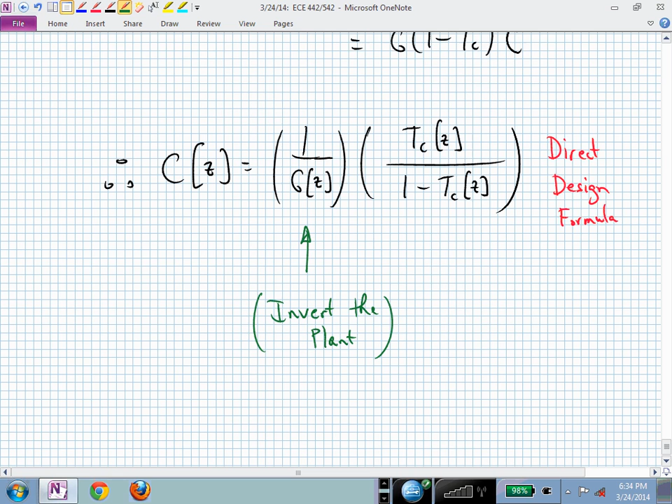It has to be designed in such a way that C of Z doesn't cancel unstable poles and zeros and certain other properties. Let's look at the first property that we need to have for our ideal T sub C. So here I will call these restrictions.

And we have restrictions because we want C of Z, it cannot do the impossible, our controller. It can't make our system

non-causal. We're in a control environment. It doesn't have a magic 8 ball or whatever. It can't see into the future, our controller, unless you know something that I don't. If you do, then come see me and we'll, I don't know, keep it hidden. Okay, we won't give it away. We'll be like the Coca-Cola formula. It'll be a trade secret. We won't patent it. We'll just keep working.

C of Z cannot do the impossible. That's the reason for these restrictions. Restriction 1.

C of Z, let's now parameterize that as some numerator. The notation is N for numerator, D for denominator, and those are polynomials. These aren't rational expressions in Z, these are just polynomials, and they are polynomials associated with our controller C. That's the subscript C. So this is N sub C, numerator of the controller, D sub C, denominator of the controller.

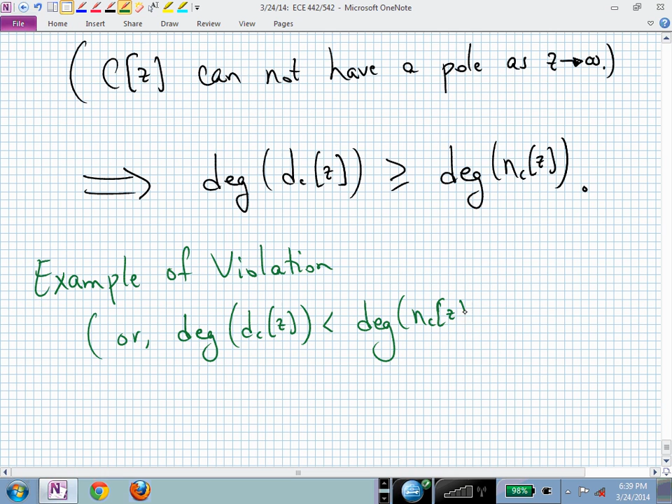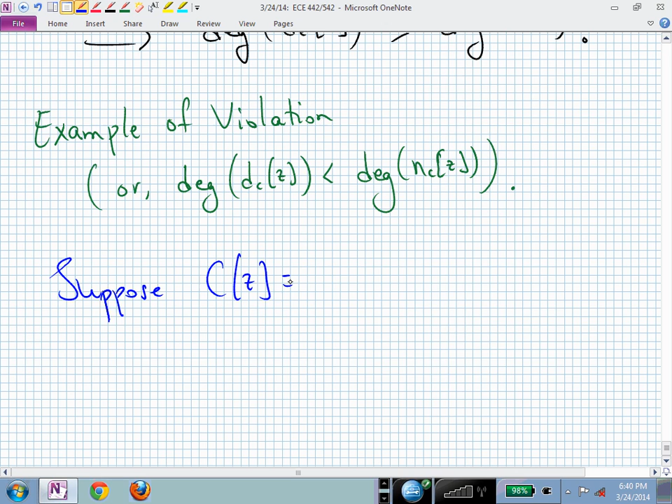So that we can violate this condition. If we want C of Z to have a pole at infinity, we could make that happen more easily, but let me build it up a little bit bigger. Let's say I have z squared minus 3/4 z plus 1/8.

If you're good at factoring, you know where the zeros are: they're at 1/2 and 1/4. So we have a zero at 1/2 and 1/4. I have no idea where that pole is. The pole is at 1/8. So we have no pole zero cancellation. We have a pole at 1/8, and we have two zeros.

It's not so much where those are located that's important. What's important is the degree of those. In this case, the degree of the numerator is strictly bigger than the degree of the denominator. That's clear, isn't it? We have a second order versus a first order.

So what does this give us? Well, remember what C is. We could write this in terms of delays. This is written in terms of advances, isn't it? But if I write that in terms of z to the minus 1s, I can do that by multiplying by a 1, where my 1 is a special 1, z to the minus 2 over z to the minus 2. That gets rid of my biggest power of z.

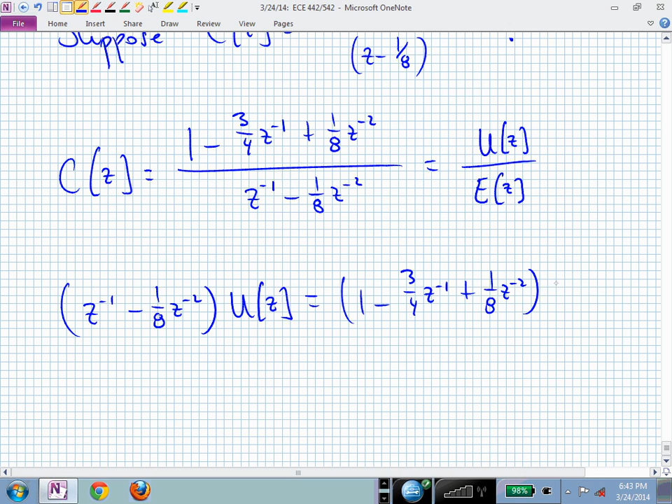If we cross multiply, then we have z to the minus 1 minus 1/8 z to the minus 2 times u of z, and I just did this so that I could have my u's on the left, but I hope you can sort of do this mentally. And now I have e of z being scaled by 1 minus 3/4 z to the minus 1 plus 1/8 z to the minus 2 times e of z.

Let's go into the time domain. That's the frequency domain, but now we can push that into the time domain. You should be able to do that in your sleep, right? You were dreaming about GC over 1 plus GC before, so now you can really do this. Which means on the left we have u of n minus 1 minus 1/8 u of n minus 2. That's equal to e of n minus 3/4 e of n minus 1 plus 1/8 e of n minus 2.

Does anybody see a problem? U is the signal that's driving our system, our plant. That's the input.

Let's just substitute in a convenient value for n. Maybe I want to think about u at the present time, so let me let n equal 1. U right now, the input right now, is a function of the input one time step before, the error when? What was n? 1. What? The input now depends on the error when? In the future. This is not Back to the Future. We can't be doing this, can we? We don't have our whatever car to get us back to the future. Maybe we can build one. Like I said, if you know a way to do this, let's talk.